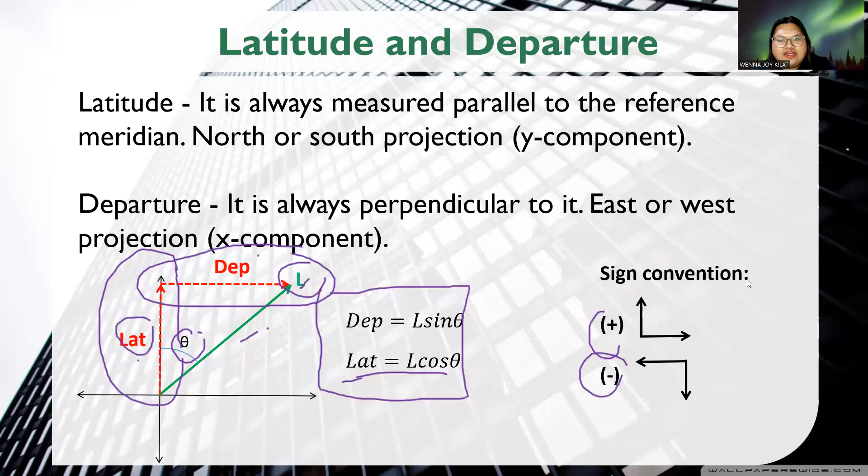So since it's bearing, the theta is always there, right? Next you need to do this to get the line 2 to 3. So that's given too. The angle, remember when we say bearing, our reference meridian is always to the north or south. So do the same for the next one.

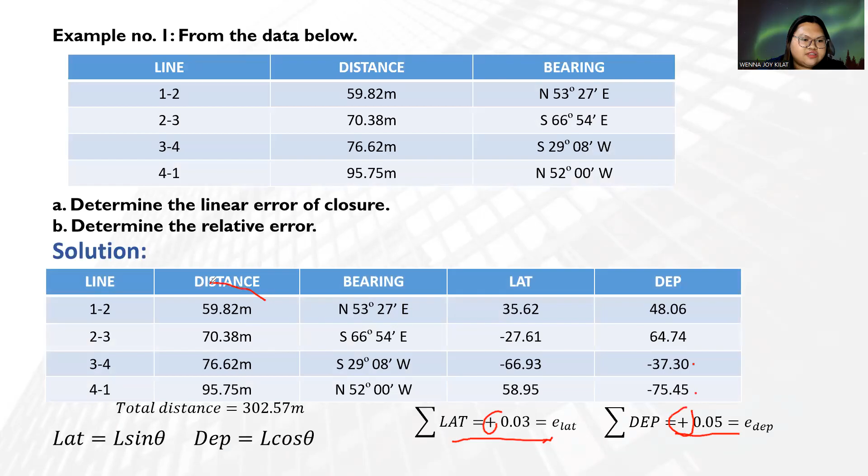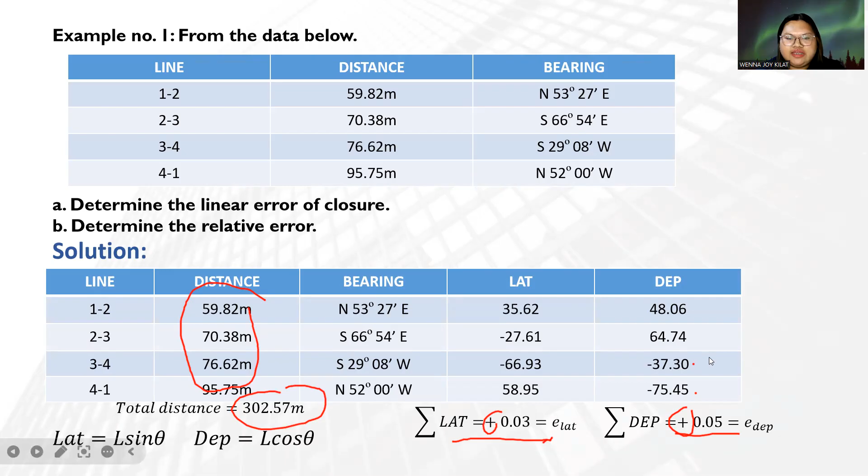So our formula here is 1 over total distance over LEC, equals to total distance. Where is the total distance? Just add all the distances here: 59.82 plus 70.38 plus 76.62 plus 95.75, which equals 302.57. So 1 over total distance over LEC, that's the answer.

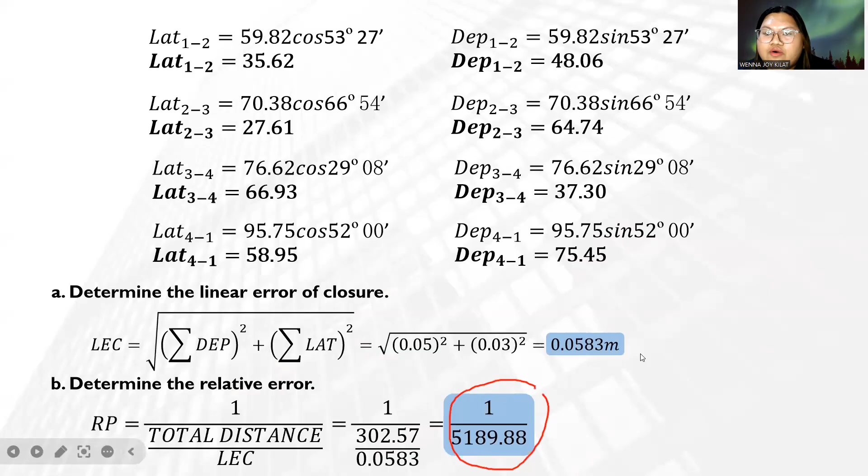Okay, let's proceed to the next topic, balancing a traverse. As in our problem here, when we sum the latitude or departure, it does not equal 0. If our answer is positive, it means there's an excess, so we need to correct it. We need to correct the latitude or departure we got so that the summation becomes 0. We have two methods we can use to correct our latitude and departure so that the traverse closes.

First method: the compass rule method or the Bowditch method. The correction to be applied in the latitude or departure of any course is proportional to the ratio of the distance or length of the course to the length of the traverse. So if compass rule is used, always remember the distance or length.

So here is the correction. This is still ratio and proportion, which makes it easier if we use that approach. Always remember this: correction of a certain latitude over error of latitude, which is the summation of all latitude, equals the distance of that certain latitude over total distance.

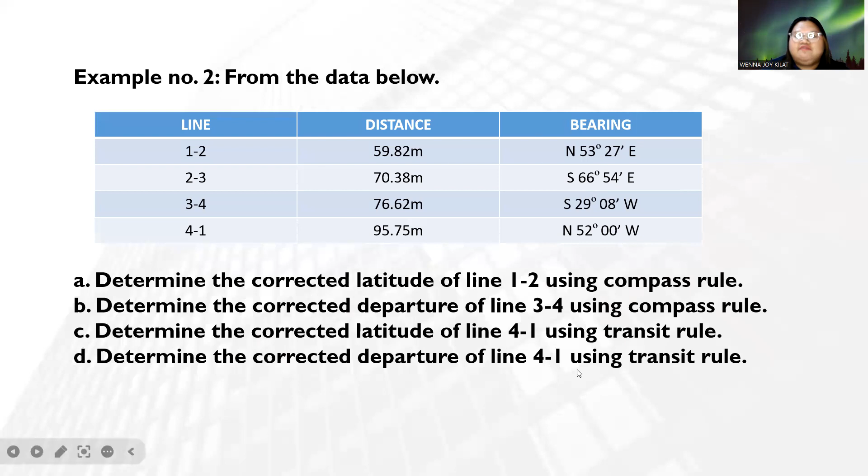Letter C: proceed to determine the corrected latitude of line 4-1 using the transit rule, and determine the corrected departure of line 4-1 using the transit rule.

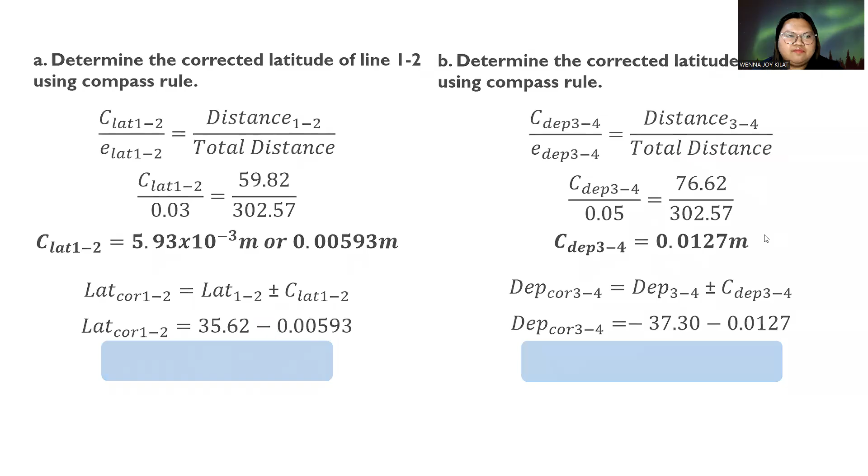Let's proceed to letter C. Same information still. This time we will use the transit rule. This is also a method.

So determine the corrected latitude of line 4-1 using transit rule. When we say transit rule, remember our ratio should be based on the summation of latitude or summation of departure - unlike distance, which is used in compass rule. Since this is transit rule, we use the summation of latitude or summation of departure.

Again, it's the same. So correction of latitude 4-1 over total error of latitude is equal to the absolute value of latitude of 4-1

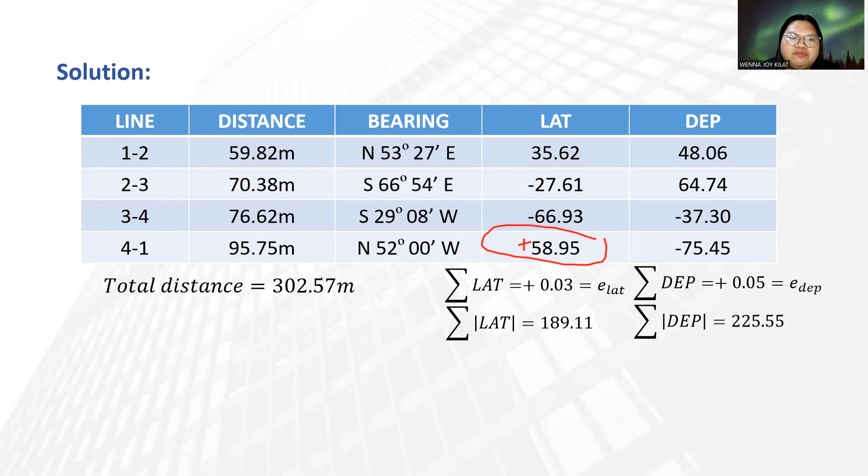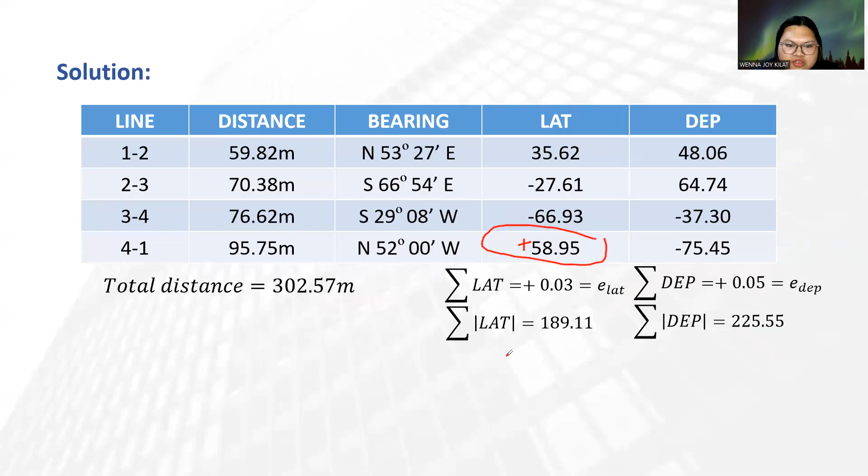So what is the absolute value of 4-1? It's 58.95, positive here, right? So it's 58.95 over the total summation of absolute latitude. So what is our total summation of latitude? It's 189.11. So it becomes 58.95 over 189.11.

So calculate it. Hopefully we get the same answer.

Next, we can get the corrected latitude of 4-1. So latitude 4-1 plus minus the correction. Latitude correction of 4-1 is here. So 58.95 is the latitude, minus 0.00935.

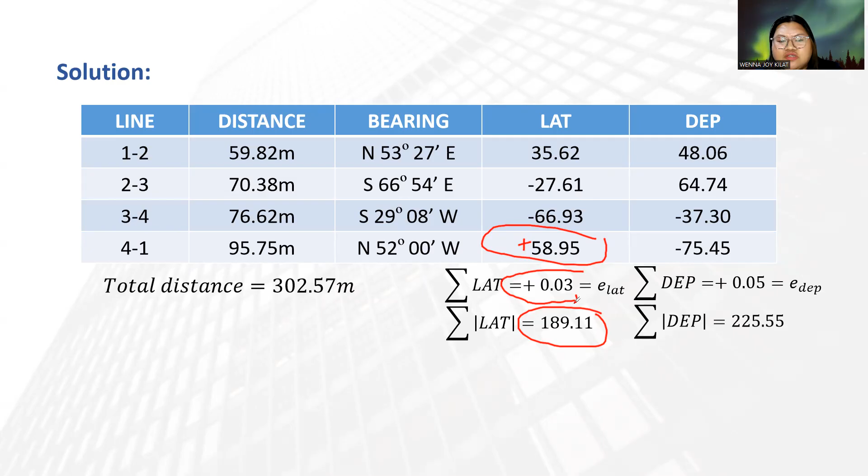Okay, okay, thanks very much.

Next, determine the corrected departure of line 4-1 using transit rule. Same line but now we look for departure. So it's the same - correction of departure 4-1 over

total departure error is equal to the absolute value of departure 4-1 over the summation of absolute value of departure. We know our departure error is 0.05, and our departure, absolute value, of 4-1 is negative 75.45. It's negative here but since we need absolute value, we neglect the sign. So we use 75.45 over summation of departure

which is 225.55. So calculate it, cross multiply with 0.05. Hopefully we get the same answer, 0.0167 meters. So that's the correction of departure.

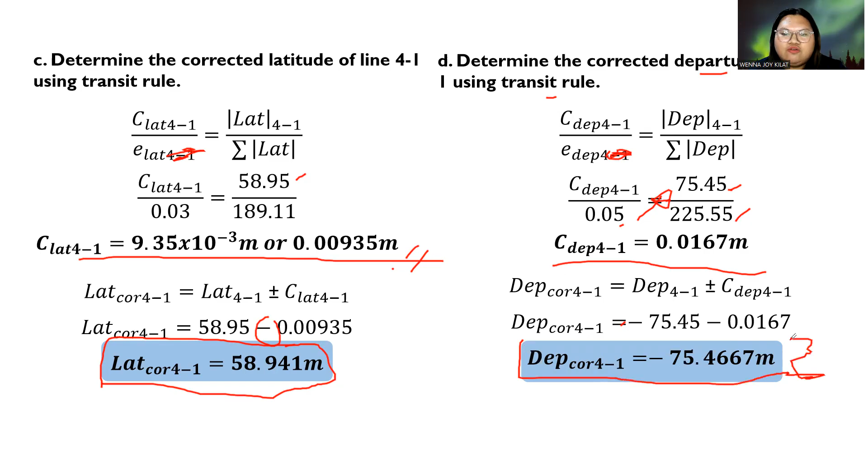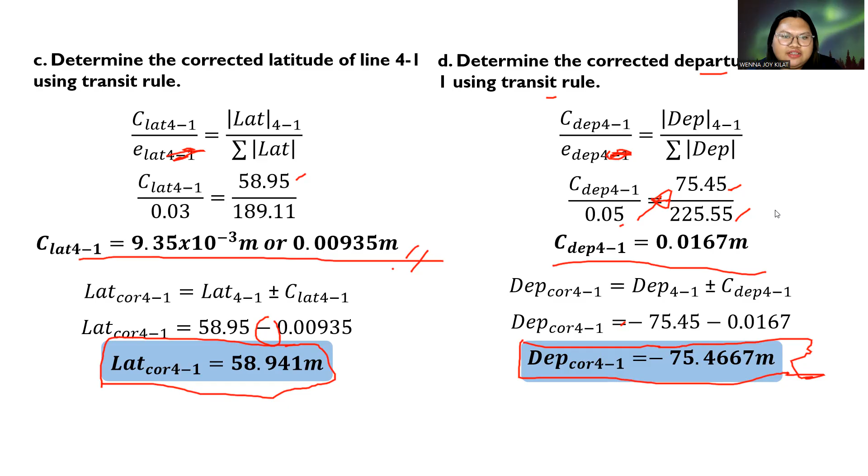Next, area computations. Since we are surveyors, we are asked to get the boundaries of the line, so we need to get the area. So we have two methods commonly used.

First is the trapezoidal method, and second is the Simpson's 1/3 rule. The trapezoidal method can be used whether the given latitudes or distances have even or odd offsets. But Simpson's 1/3 rule is strictly for odd offsets only.

You probably know even and odd already - even numbers are 2, 4, 6, 8, 10 and onwards, while odd numbers are 1, 3, 5, 7, and 9 and onwards.

So the formula is: area equals 1/2 times D. This D is the common distance - meaning all the distances are the same.

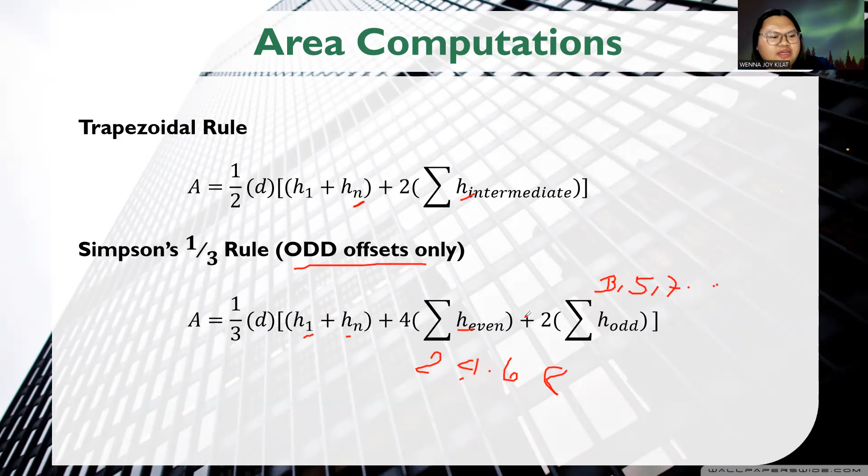So unsa man ni siya? Mantong first, ay dili first, sa third na ta mag-start eh. Third, fifth, seventh, and so on. So to further understand ni siya, let's proceed to our problem.

Okay, so example number 3. The following offsets were taken from a chain line to an irregular boundary line at an interval of 10 meters. So ang interval daw kuno niya ani nga mga heights kay 10 meters, mao na siya atong common distance or the letter D. So we have 0, 2.5, 3.5, 5, 4.6, 3.2, and 0 meters. Mao na siya itong mga height.

So compute the area between the chain line. Mao na itong mga chain line kani, and kana pang duha ka lines. So kuhaon na to ang area kani nga mga area kani nasa tunga-tunga kana, the irregular boundary line and the end offsets by trapezoidal rule and Simpson's rule.

Again, take note ha, kung nisay Simpson's rule, di ba kay for odd offsets lamang siya. So ma'am, unsa man to ma'am kung giingnan mi ma'am nga use Simpson's rule unya dili man odd ang heights, ang iyang offsets? For example, 8 man siya kabuok ma'am. Okay, so ang inyo lang gamitan og Simpson's rule kay ang 1 to 7, okay, kay odd ra man di ba. So 1 to 7, pag makuha na nimo ang area gamit ang Simpson's rule, kuhaon dayon ninyo ang area sa 7 to 8.

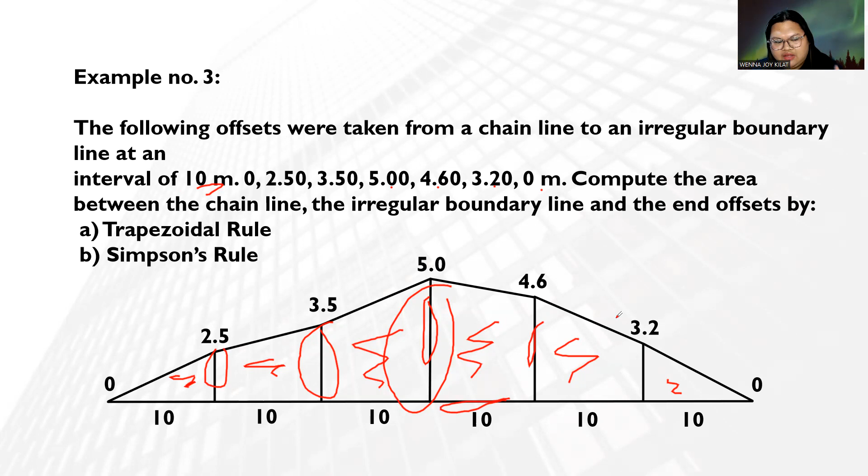Okay, so let's proceed. So first, trapezoidal rule ang tong gamiton. So mo ni ang formula, di ba? So 1/2 D, D is the common distance. So unsa kay ang common distance nga giingon sa problem? So we have here that 10, diba 10 man ang common distance. So mao nang 10, nara, check, 10 times h1 plus hn.

So h1, mao ang height, first nga height, so mao ito ang h1, so it is equal to 0, kay 0 man siya. So mao siyang 0 plus hn, so n man siya, meaning kung ang pinaka-last n siyang gigamit, kay wala man ta kabalo kung pila ang gihatag sa given nga last, basta kay kana siya pinaka-last. So atong hn diri kay 0 gyapon siya. Okay, so mao na siyang 0 diri.

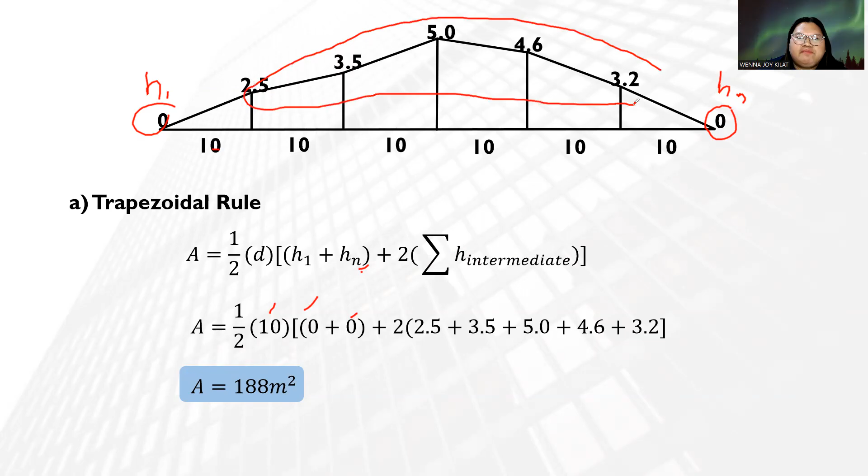Plus 2 times h height daw, intermediate nga height, summation of intermediate. So i-add din nato ning mga intermediate, tanan kaning naa sa tunga. So 2.5 plus 3.5 plus 5.0 plus 4.6 plus 3.2. Okay, now i-calculate and we will get the area.

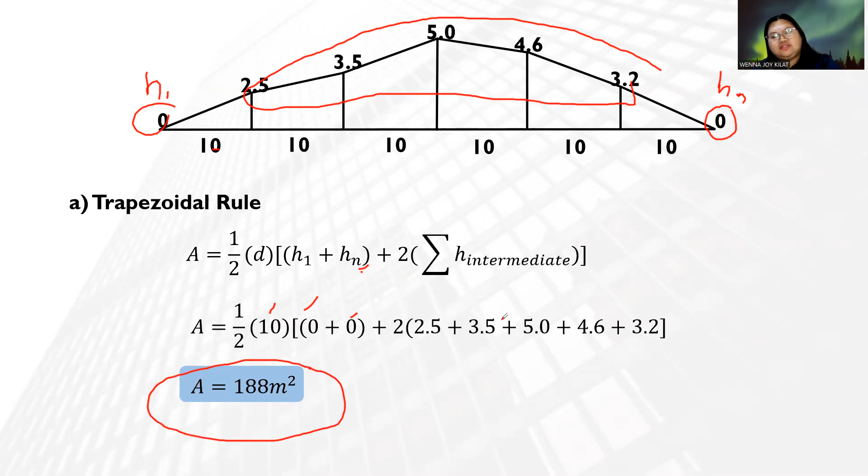Hopefully nasabtan ninyo ha. Next, proceed sa Simpson's rule. Simpson's rule, so area, so 1/3 times D, mao ang common distance. So ang common distance sa problem is the 10, times h1. So atong h1 diri kay 0, same ra gyud. So mao gamiton ang atong hn, ang pinaka-last nga height is also 0. Again guys, bahalag 0 na ang naa sa inyong mga endpoints, isulat gyapon ninyo siya.

Kung inyo nang na-intindihan, direta mag-start ta. Okay so, nag-gets na ning 10, nag-gets na ning 0, 0, plus 4 times summation of even heights.

Unsa itong even? So 2, 4, 6. Sa atong case, ang atong even kay mao ning 2, mao ning 4 nga heights niya, ug mao ning 6. So 7 na siya ka heights, so pasok na siya sa Simpson's rule.

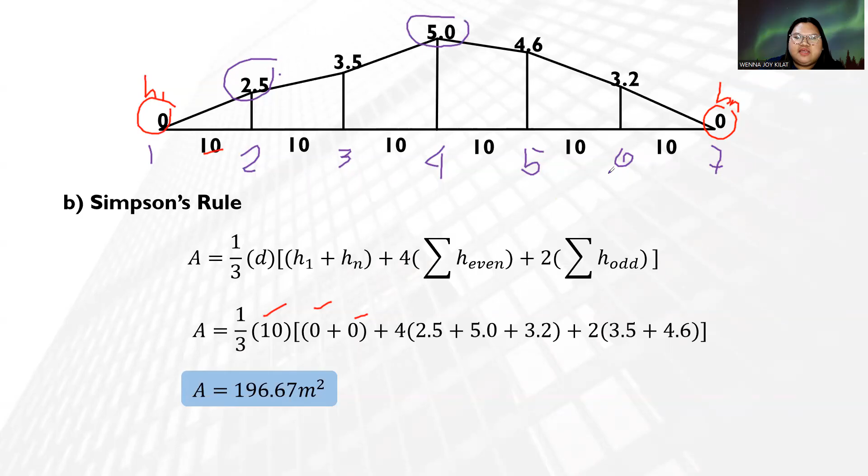Again, 4 times height sa even. So atong even kay 2.5 plus 4, so 5.0 plus even na 6, so 3.2. Ato na siyang i-add.

Plus 2 times height sa odd. Unsa man ang mga naa sa odd? Odd na to kay 3, mao ning 3.5. Odd na to 5, napa 4.6. So 2 times 3.5 plus 4.6. Imo na siyang i-calculate sa calculator and you will get 196.67 square meters.

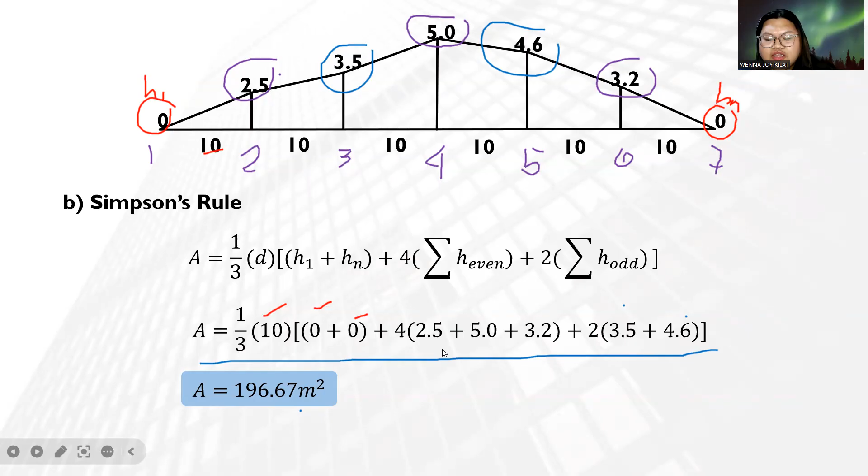Okay, kung naa moy wala nasabtan ani, take note kay pwede ninyo i-raise sa consultation. Okay, next.

Next kay area computation for a closed traverse. Kaganina kay kung chain line, mahibalaan ninyo nga kung chain line ang given kay naa siya common denominator, common nga distance. Tapos naay mga offsets, ang mga height offsets. Kani kung closed traverse na gyud ang ipakuha nga area.

Sa closed traverse nga area, naay duha ka method sa paggamit, mao na siya ang DMD o DPD. First natong gamiton kay ang DMD, double meridian distance method.

Naay mga rules. Rule number 1, the DMD of the first course is equal to the departure of the course. Kung mohingon og DMD, double meridian distance, always remember nga departure ang gamiton. Ang DD diri stands for departure, meridian departure of the course.

Okay, mas masabtan ni. Ang first nga course is equal to the departure of the course. Masabtan na ni doon sa problem.

Rule number 2, the DMD of any other course is equal to the DMD of the preceding course plus the departure of the preceding course plus the departure of the course itself. Libog kayo no, pero you will understand it later sa sample problem.

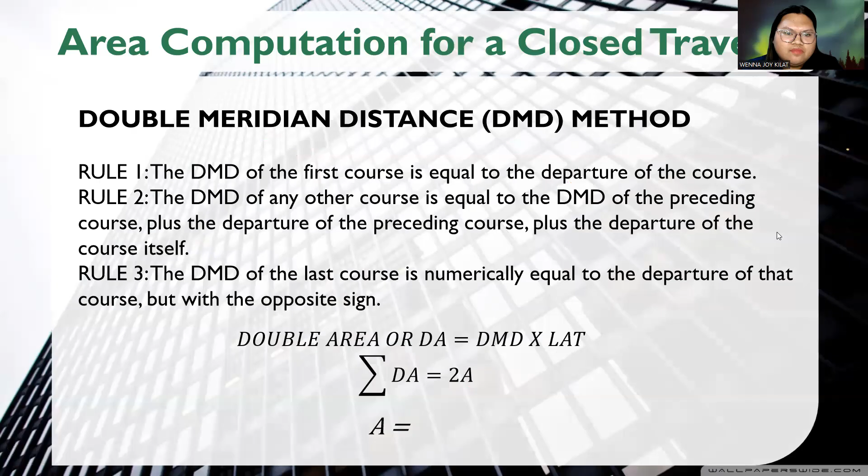Next, our second method is the DPD or the double parallel distance method. Rule number 1, the DPD of the first course is equal to the latitude of the course.

Remember, kung ang DMD ang kwaon sa iya kay departure ang atong gamiton, diri sa DPD ang atong kailangan is the latitude. Timanan ninyo, parallel latitude. Meridian, departure; parallel, latitude.

Rule number 2, the DPD of any course is equal to the DPD of the preceding course plus the latitude of the preceding course plus the latitude of the course itself. Libog kayo siya no pagbasahon, pero promise, simple ra gyud ni pagka mo na mag-solve.

Rule number 3: the DPD of the last course is numerically equal to the latitude of that course but with the opposite sign. This will serve as your checking. The DPD should be equal to the latitude of the last line or course, but opposite its sign.

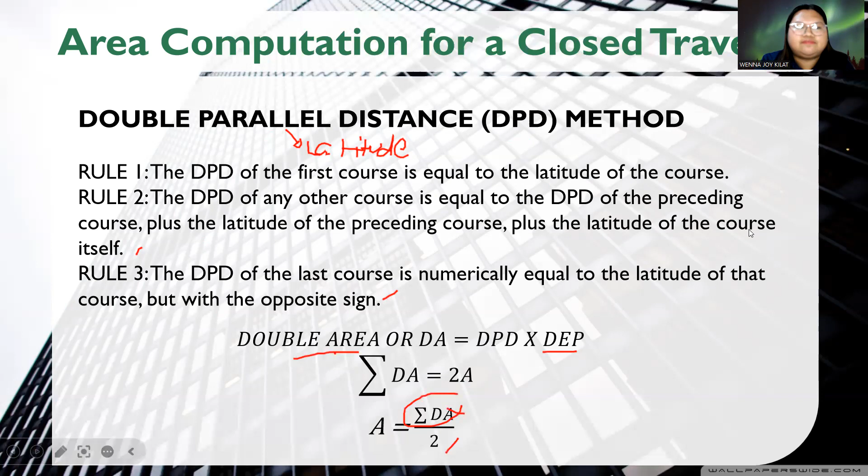Example number 4A: given the traverse, determine the area of the lot using DMD, the double meridian distance method. So we are given this line, with the latitude and departure already given. Let's proceed.

First, let's get the DMD. With the given rules, let's recall what he taught us. He said that for DMD, we will use the departure. So according to rule number 1, the DMD is equal to the departure of the first course.

So for line 1-2, what is its departure? It's 19.696. So that becomes the DMD.

Next, rule number 2: to get the DMD of other courses, you add the DMD of the previous course to the departure of the previous course, plus the departure of the current course. So the DMD of the previous course, 19.696, we add it to the departure of the previous course, which is also 19.696, then add the departure of the current line, which is 5.130.

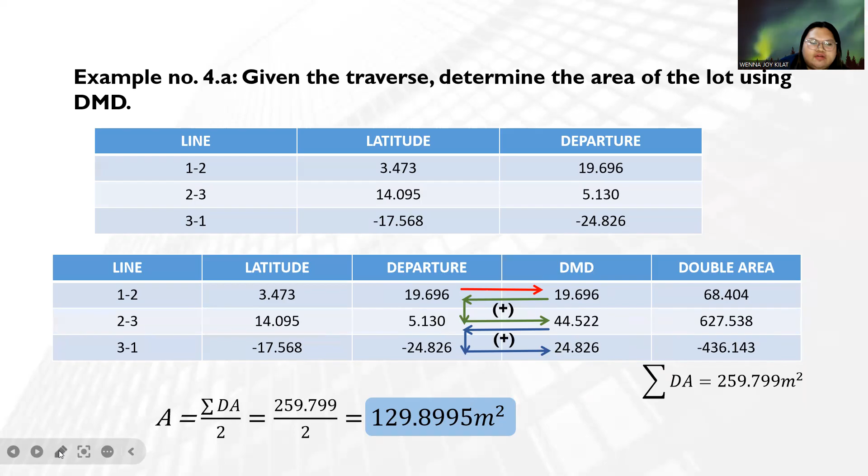Is equal to 259.799 square meters. Since area man natong kailangan niya, double area man, di ba? Summation of dA is equals to 2A. So area na itong kailangan. So kaning summation of dA, ato siyang divided by 2 na to siya, para makuha ang area. So 259.799 divided by 2, we now get the area which is 129.8995 square meters. Hopefully nasabtan na.

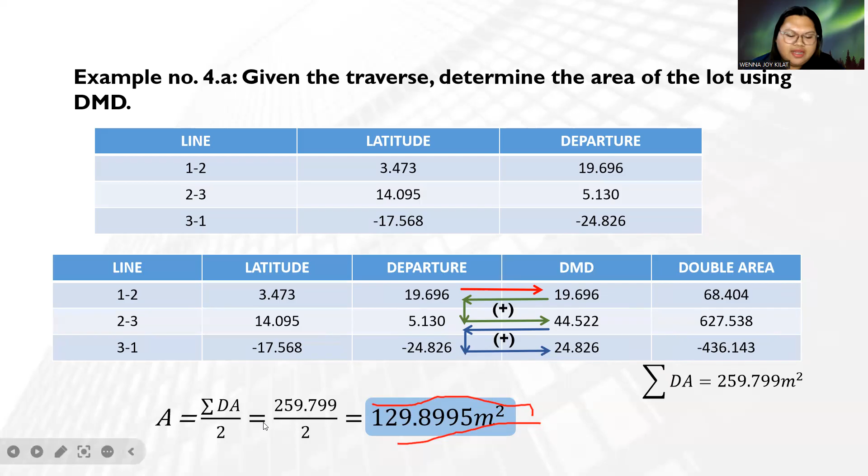So let's proceed to our last problem. Same problem pero using DPD. Now, when you say DPD, that is a double parallel distance.

So ito, basta parallel sa DPD, dito na punta mag-base sa latitude. Ay, sayop din yun. DPD niya, kani guys, wala na ako na-edit kani. P din ni siya P. DPD, okay, DPD na siya.

Okay, next, so para makuha na to first, so Rule number 1, kung unsa daw ang latitude anang first nga course, maupo daw ang DPD sa first nga course. So since 3.473 man ang latitude diri, so ang atong DPD diri kay 3.473 pod. Okay, hopefully nakuha ha.

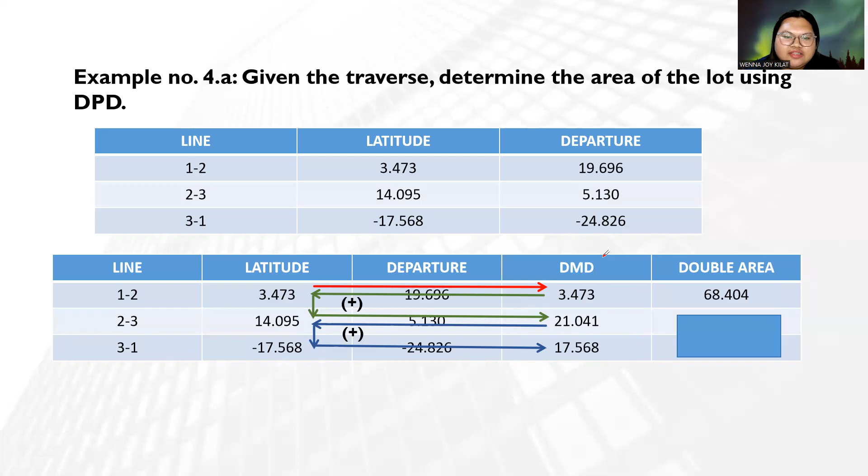Next, DPD 21.041 i-times na to kang 5.130. Answer is equal to 107.490, ay 940.

Next, DPD 17.568 times na to sa departure. So nara, negative 24.826. Hopefully same tag answer na ra, equal to negative 436.143. Okay, so now nakuha naman nato.

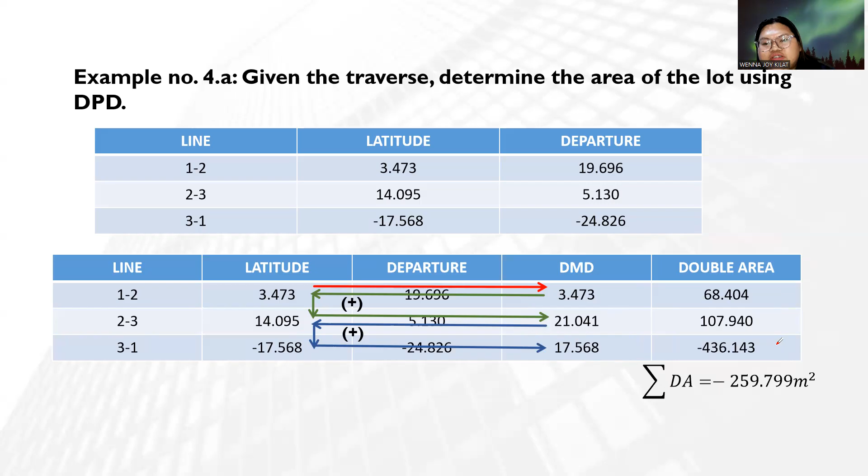So kuha na to ang summation of double area. So summation of double area, we have negative 259.799. As you can see, same ra siya dito. Okay, same ra siya sa atong previous using the DMD.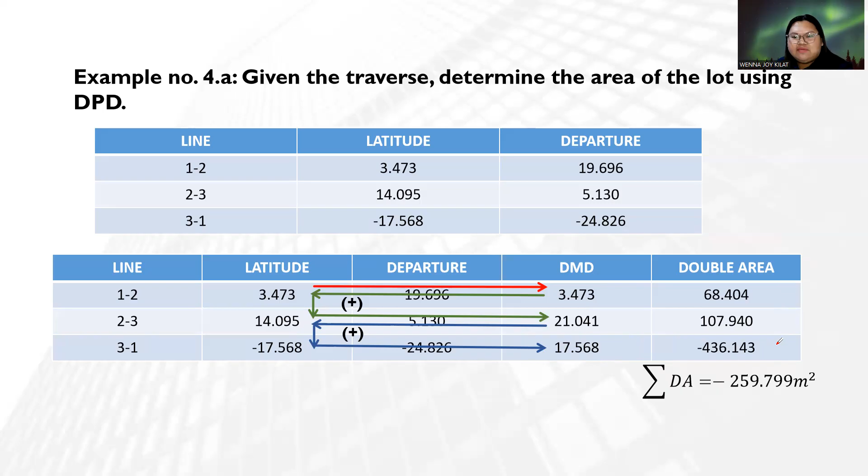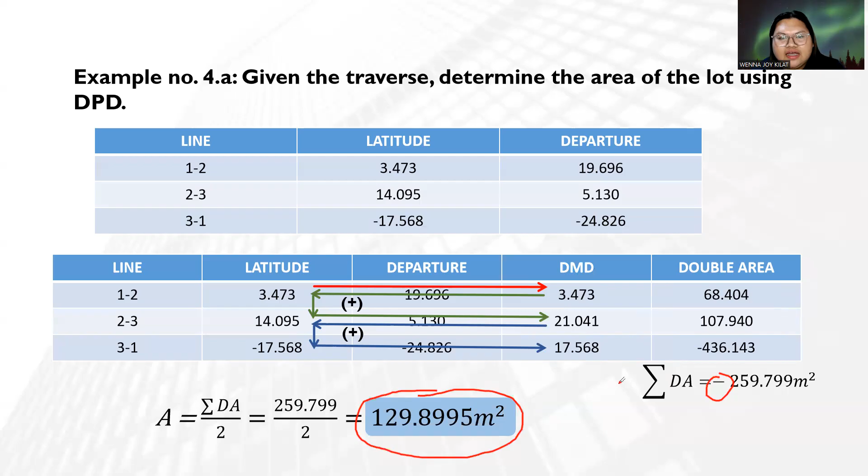Diba, same ra siya. So now kaya naman tayo double area, pwede na nato makuha ang atong area, ato lang i-divide og 2 ang atong summation of DA. Again, take note, kung makakuha og negative diri nga summation of DA, i-neglect na nato ang sign pagkuha na nato ang area. Okay, so dili na mag-mind ang sign kay wala may negative nga area, di ba? Make sense? Nara, so 259.799 divide 2 is equal to 129.8995. Same ra ang iyang answer. Okay, so hopefully nga nasabtan ninyo ha.

So guys, that's it for our episode number 6, no? So hopefully nga nakasabot mo.